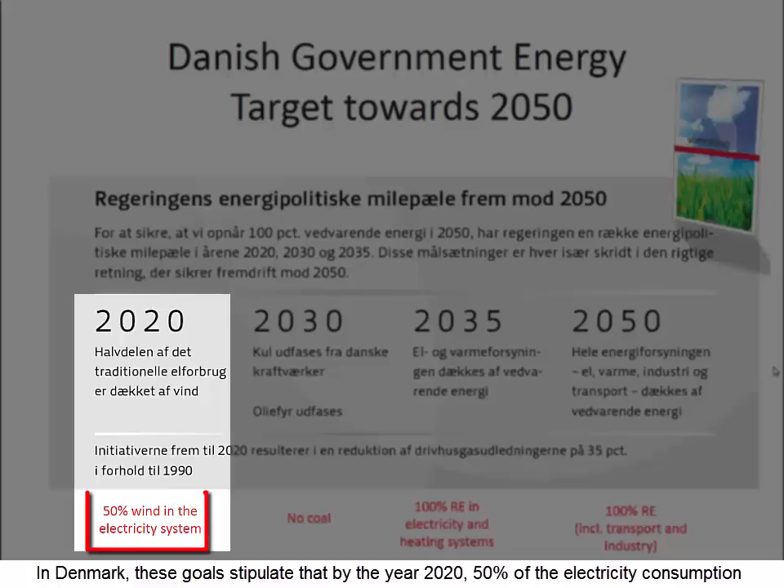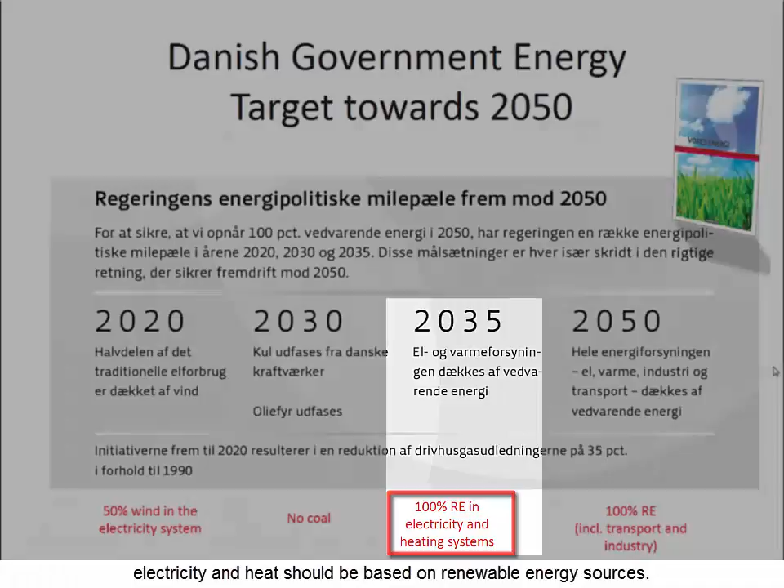In Denmark, these goals stipulate that by the year 2020, 50% of the electricity consumption should be supplied from renewable energy sources, and by the year 2035, all supply of electricity and heat should be based on renewable energy sources. Fulfilling these goals will result in a fluctuating power production that is dependent on the prevailing weather conditions. Such fluctuations impose major challenges for a stable and secure system operation.

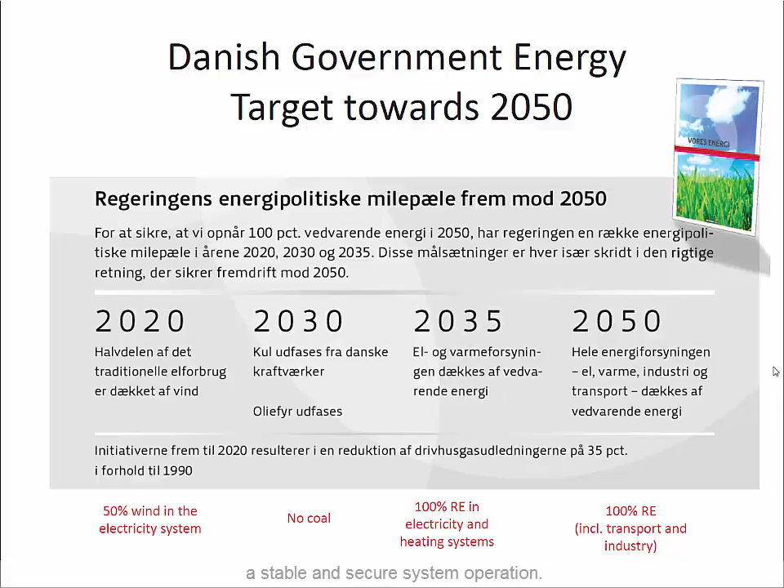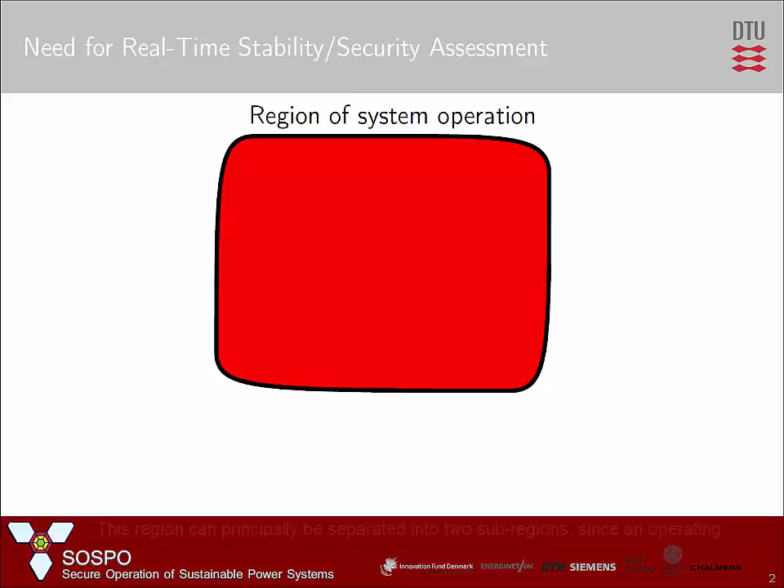To quickly explain the concepts of system stability and security, it is useful to use such a conceptual figure as shown on this slide. The figure conveniently represents the region of all possible operating points for a given power system. This region can principally be separated into two subregions, since an operating point can either be classified as an unstable point or a stable point, as indicated here by the yellow region.

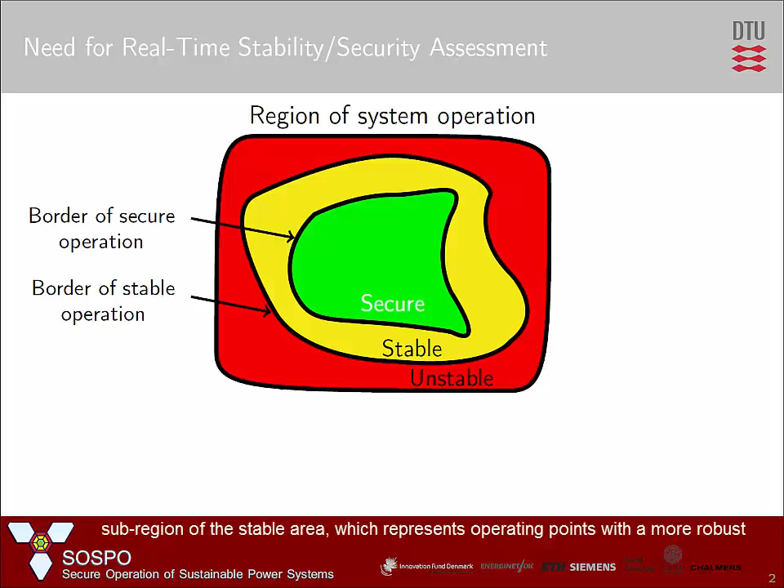When operating power systems, it is desired to operate within a subregion of the stable area, which represents operating points with a more robust stability. When operating within this area, the system operation is said to be secure, and the operators can be sure that the system will survive, for example, any single normal contingency that might occur.

The reason why it will become a challenge to ensure a secure operation of the future fluctuating power system is related to how a secure system operation has been ensured in the conventional power system. The existing approaches to ensure stable and secure operation rely on time-consuming offline computations to determine secure system conditions. Such offline approaches have worked well for the conventional power system, where the power production is based on non-fluctuating energy sources.

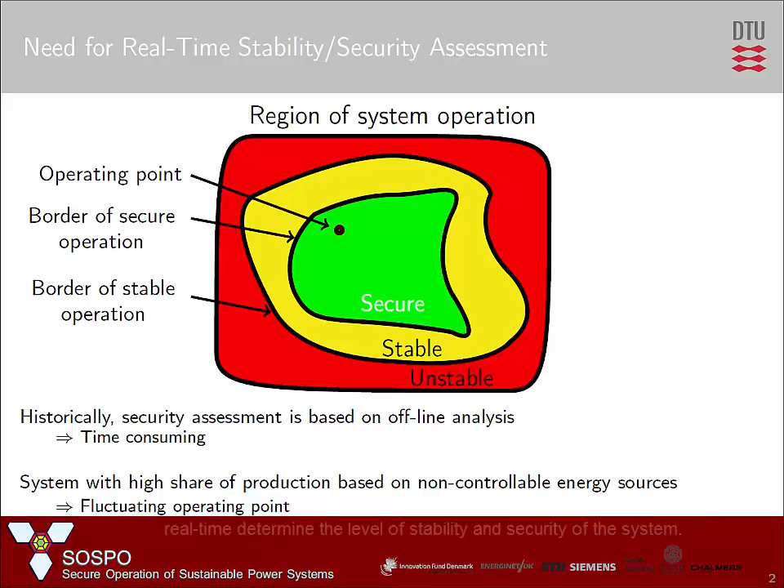On the other hand, when the power production becomes based on non-controllable fluctuating energy sources, there will be a need for new methods that can in real time determine the level of stability and security of the system. Furthermore, when critical conditions have been identified, there is a need for methods that can determine which corrective control actions can be taken to avoid system instability and re-establish a secure system operation. Such methods will become essential to avoid system instability and large-scale system blackouts in the future power systems.

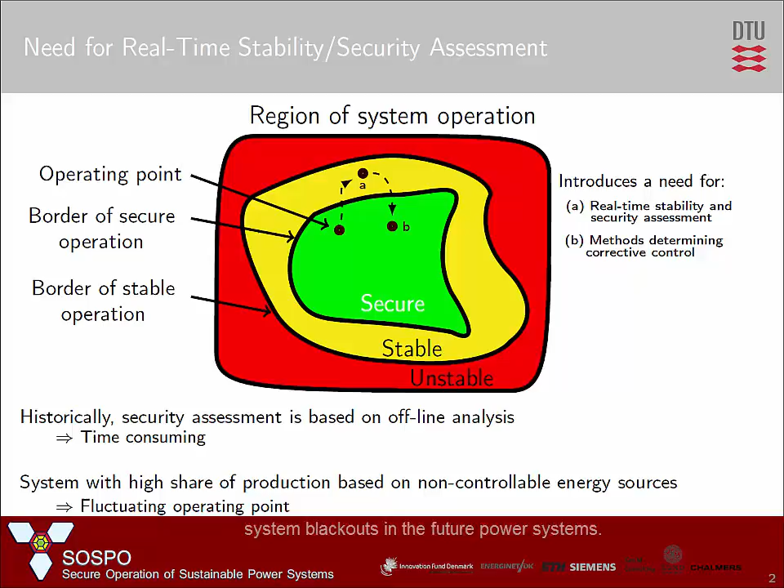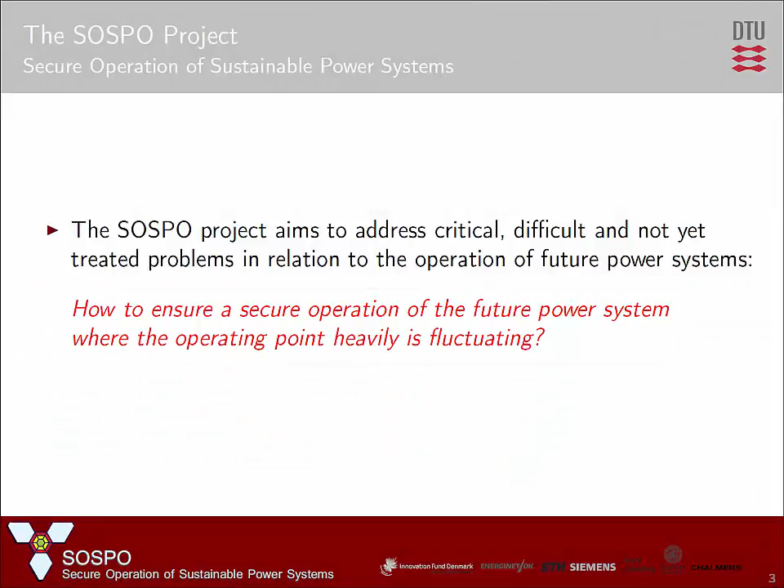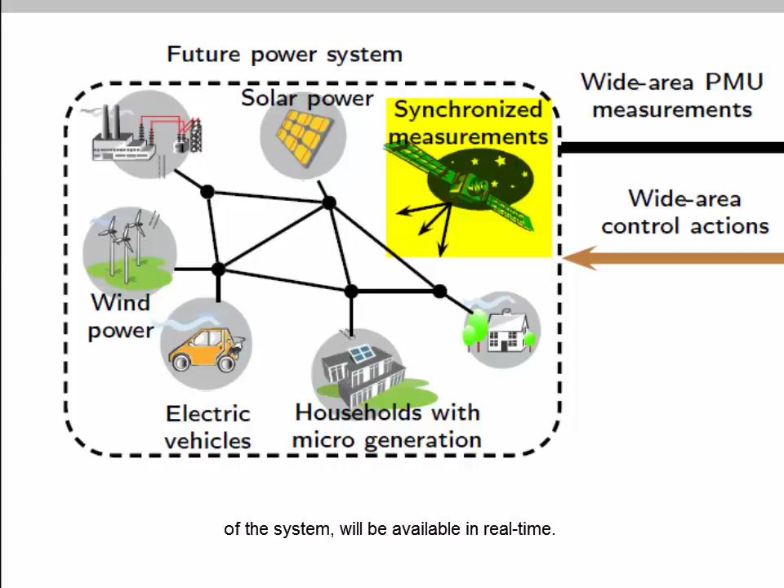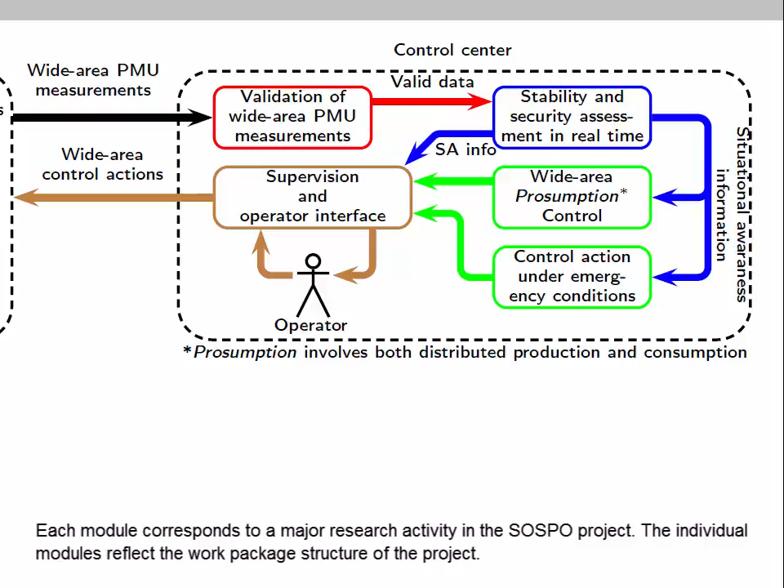The right-hand side of the figure shows various modules that are envisioned as parts of an integrated operational solution that ensures secure system operation in real time. Each module corresponds to a major research activity in the SOSPO project. The individual modules reflect the work package structure of the project. The operational tool is envisioned to work in the following way.

Synchronous PMU snapshots will be received in real time from the future sustainable power system. The first thing to do before the data can be used is to make sure that the data set represents an actual operating condition. This will be done by methods that in real time validate the received measurement snapshot and replace faulty data with realistic estimates as needed.

The output from this module will be a validated measurement snapshot, which will serve as input to a range of methods for assessment of system stability and security in real time. The assessment module returns situational awareness information when the stability and security margins of the current operating point have been determined.

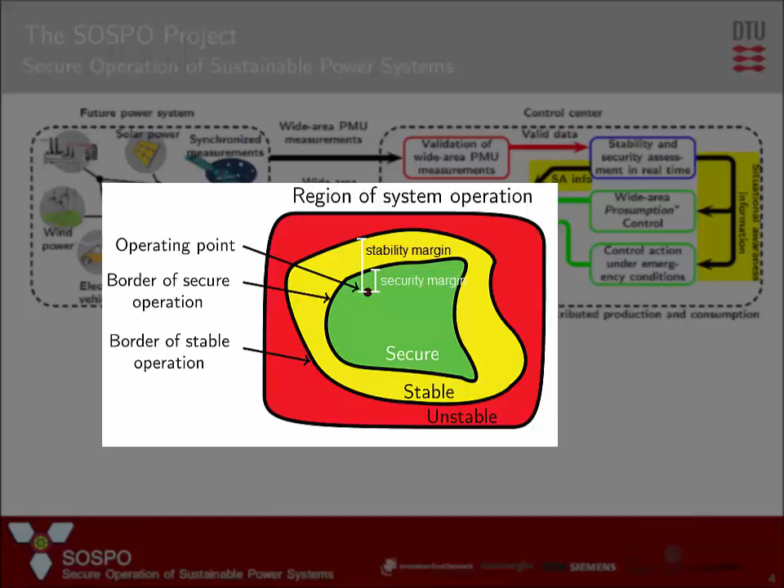The situational awareness information serves as input into two modules that determine appropriate countermeasures against stability and security problems. The objective of the wide area prosumption control is to resolve security problems by exploiting controllable loads and distributed production for that purpose. This module determines new prosumption patterns that would re-establish secure system operation. The second control block determines effective emergency control actions to avoid emergent system instability and potential large-scale blackouts.

The situational awareness information, together with the outputs from the control module, serves as input to a supervision and a visualization module. This module presents the state of the system to the operator in a crisp and informative way and makes sure to apply countermeasures when necessary.

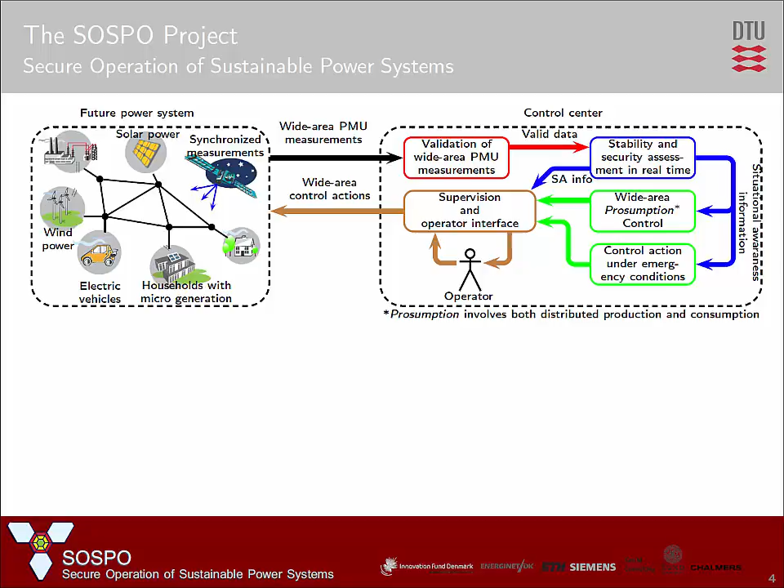In the SOSPO project, we wish to demonstrate our research results in a realistic environment. For that purpose, a software demonstrator will be developed where all of the developed methods will be implemented into a single operational solution. For the testing and demonstration purposes, equipment from the state-of-the-art laboratory, PowerLab DK, will be exploited. This includes a real-time digital simulator that is used to represent a future power system, and a powerful IBM Blade Center that is used for software implementation.